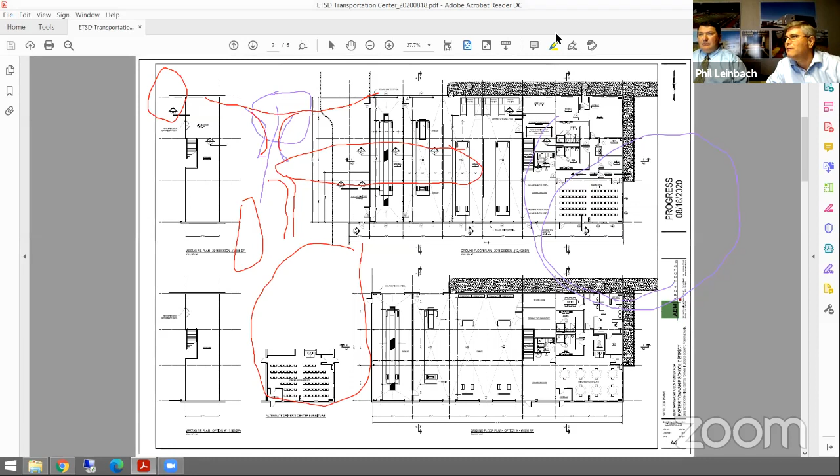And they're all on this screen now too. So where's my erase? Clear—oh, there we go. Sketch was a lot easier. I gotta turn that off.

Here we go. So what's showing on the screen right now, the upper plan, is the bus garage as it was left off in 2015: 12,400 square foot footprint, about 13,185 square feet of floor area that includes the mezzanine. I'll zoom in on that first.

Starting from the left, there was wash bay equipment, an automatic wash bay pull-through for the buses, a second drive-through bay that we talked about. The orientation on this plan is the same as what we just saw on the site plan, so you don't have to try to imagine this differently. These are two service bays.

They're pull in, back out. This bay has a mezzanine in it that's part storage and so forth. And then, obviously, a restroom for the mechanics to access here, a stair going up to the mezzanine. Additional storage, utility room—that's probably going to be where your electric service and gas service are coming into the building. And then, of course, the office and driver's area on the east end of the building.

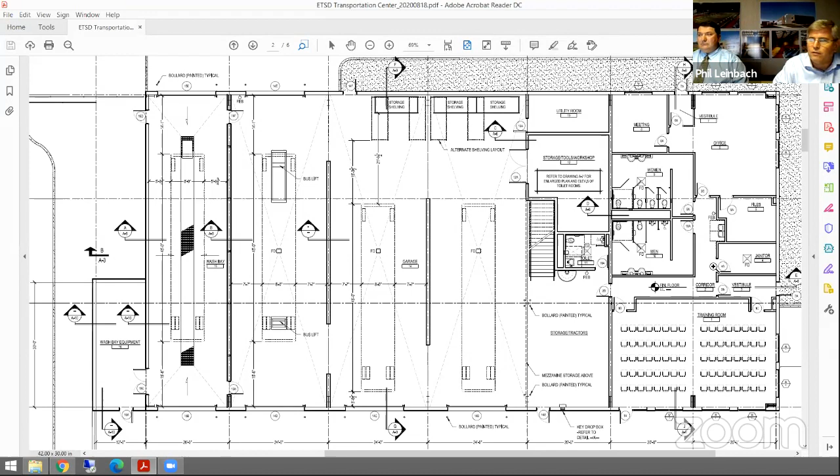After meeting with administration and with Rick's help in looking at some efficiencies, one thing we did was the overall wash bay got a little bit wider.

With the wash equipment gone and the need to have a portable mobile scrubber in there, the feeling was there just wasn't enough room to move around the bus that it was in there. We agreed with that, so that one did get larger.

And the previous design had shown some separating walls in between. They are eliminated, so there's plenty of clear space. We're looking at about 14 feet between each bus, roughly 7 feet from any bus to a hard wall surface. So plenty of room to move around.

I think safety is adequately addressed with clear movement around there.

Also, we changed the depth of the overall building. That decreased. We skinnied up the clearance at the back of the bus to about 3.5, 4 feet. And we have roughly about 13 feet to tire storage racks along the front of the 2 service bays. So they were some very good things to help us reduce the overall scope of the footprint.

Overall, then, because the building got narrower, we had to give a little bit of thought to what we could do here. Just to go back to the old plan, we reduced the number of fixtures.

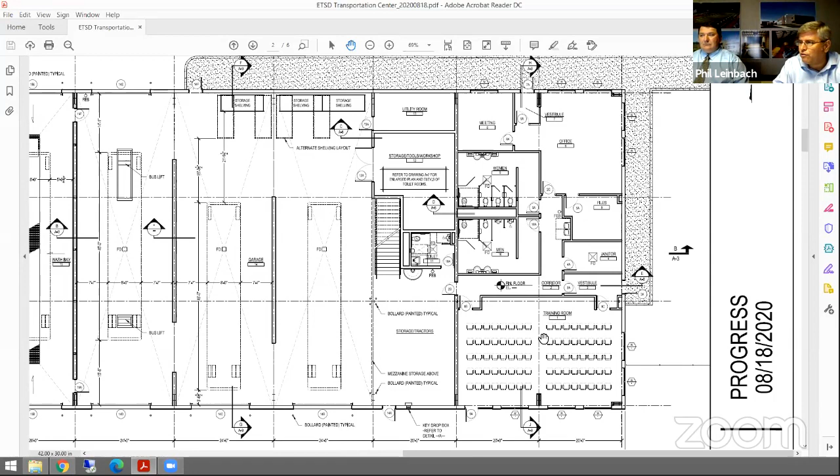Now, if Rick or somebody comes back and says I just can't do with the number of new fixtures, I think we can squeeze them back in there. But we got rid of this separated corridor off the driver's training room, as it was designated there, and just reconfigured things a little bit to deal with the lesser depth of this space. We still have the same functional program.

That corridor is gone. I have an airlock here. I put an airlock out of the back. If the drivers are parking out in the front of the building, this is where they would access the building in the morning, clock in and so forth, and then head out to the buses.

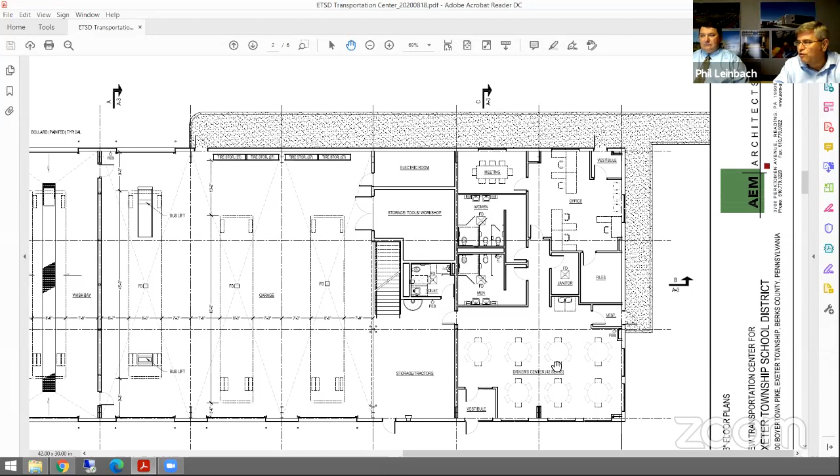So we've shown tables there for setup, more of it, for drivers if they're coming back, eating their lunch and so forth. But if we need to set it up for training, we can still squeeze about 40 seats in there, because now this corridor is really part of the driver's area to create some additional efficiencies there.

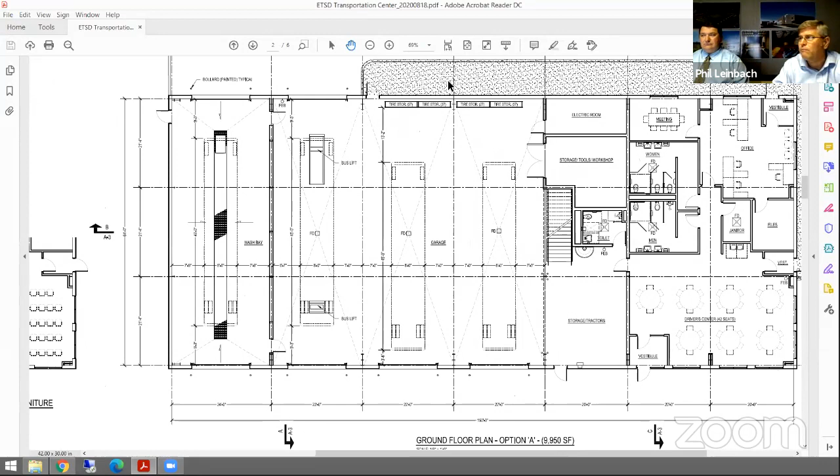The mezzanine, by virtue of the building getting smaller, is a little bit smaller overall, but it still takes up that full bay as it had previously. Any questions on the floor plans here?

I do. I'm just curious, and maybe there is a simple answer to this. Why are we using 4 bays versus 3 or versus 2?

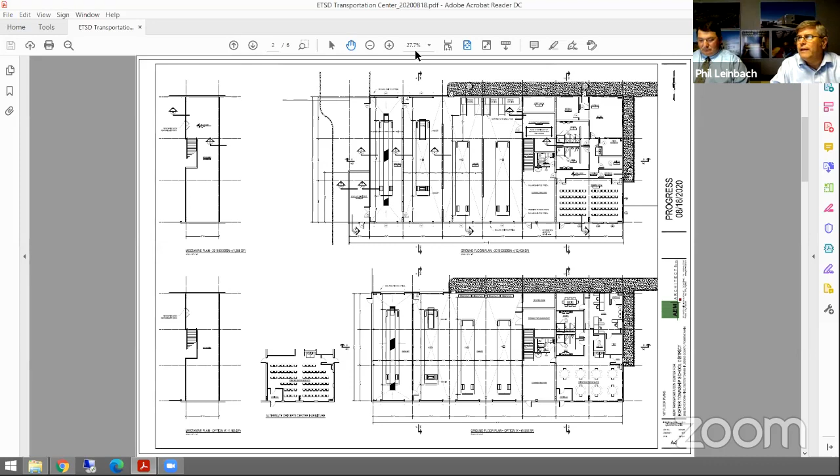We did have the discussion of the potential of eliminating a bay. The reality is we would save some costs, no doubt, on construction, but we're more or less taking volume out of the building. We're not taking a lot of constructed product out of the building.

I think previously the estimated savings to eliminate a bay was fairly minimal, was about $32,000. Inflation adjusted, it saves about $37,000 on the building, was the estimate for the savings to take a bay off.

It might be a little bit higher if we take out mechanicals and so forth, but we're just talking about heat, general ventilation in there. There's no cooling, so it is pretty straightforward finishes.

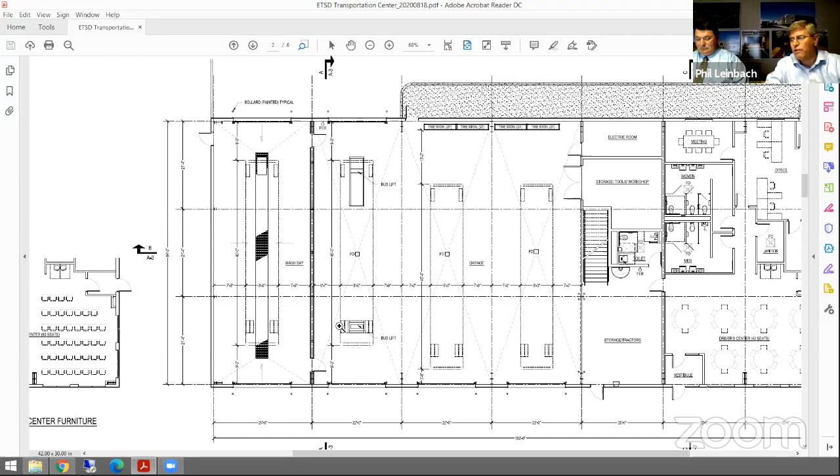Now, it is an insulated building envelope, but the bang for the buck of what you save isn't a straight square foot savings. It's not, if this overall building's about, I think, $180 a square foot on construction costs on the building, not including the site costs, I'm not getting $180 a square foot out of that to take that out.

If that's something the board wishes, as we move forward with the design, we can certainly look at that as an alternate, but that I leave to the discretion of the board and certainly administration to see the sensibilities of that. Do you guys have the discussion?

Do you guys have a running list of items like that where there are cost savings to be realized, but the return on investment is more than the investment, basically, so that if we get farther down the line and we need to make some decisions, we have a list to go to?

Because that was a pretty good response to what I'm thinking. But if there's a problem with getting support around the total cost of the building, we'd want to return to that. Certainly.

I think the goal here, as we understood it tonight, was trying to design to, I don't want to say the worst case scenario, but the largest expectation of what we would need to take to the township for the zoning variance hearing. Then once we come back and really drive the design and get the documents set, I think that's where we can talk about some of those things.

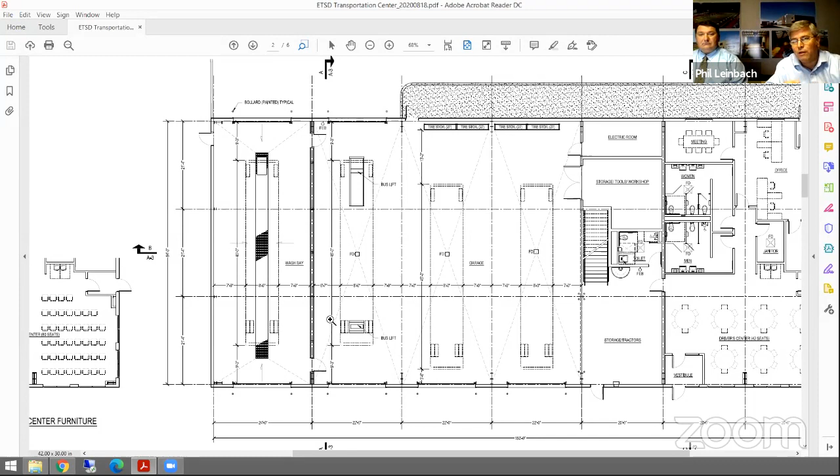Another question I have is the purpose of a meeting room. I don't know, Rick, if you can touch base on what kind of use that would have, because in my own mind, the reason I'm questioning that is the meetings where you'd need privacy are probably meetings that need to happen at the administration building. Maybe I'm just painting too broad a brush there.

Well, the drivers, we need a place for the drivers to come in. Ben has been doing refresher classes, we need a room for refresher classes. We should be doing a lot more of safety instruction, and it's much better to do it there. A lot of times you need to go to a bus. So I just think having a room where we can do those things is very good, especially when you're building a new building.

Is there a reason why you would have a meeting room that's small, like the one close to the office area, versus being able to do that in the driver's center?

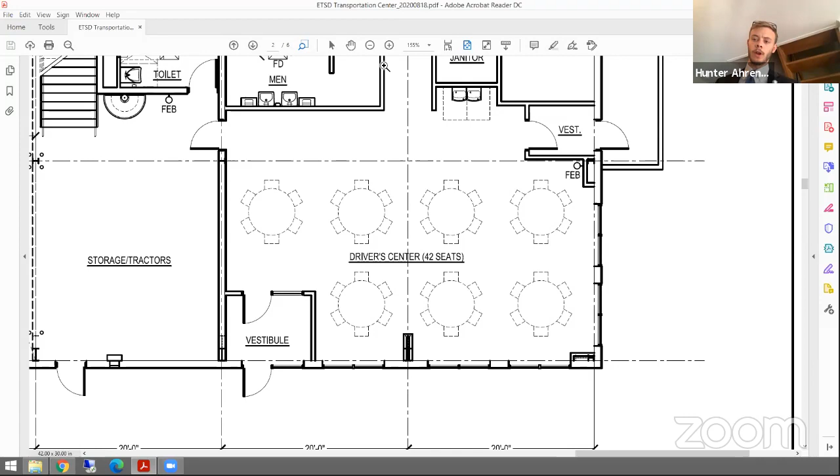Well, this meeting room here... no, one of the problems we have in this facility is no privacy. So if we have a parent who stops in, or if we have to talk to a driver in private, a lot of times I walk outside, that's the most private area. So in building a new facility and looking 30 years into the future, I thought it would be advantageous to have a room where you could address private matters privately.

If I could add to that, Rick, if you would confirm, I think we had indicated on the order of 30 to 35 drivers are coming into the building at a given time, that could be in that area as they're getting ready, clocking in, and heading out to the buses. That's on a usual day, in addition to that space doubling as a place for training and certifications.

Yes, that's correct, because you have everyone coming and leaving in less than a half-hour span, so it does get busy. And then at the end of the morning run at 9 o'clock, when everyone needs to use the facility, yes, there are quite a few there at a time.

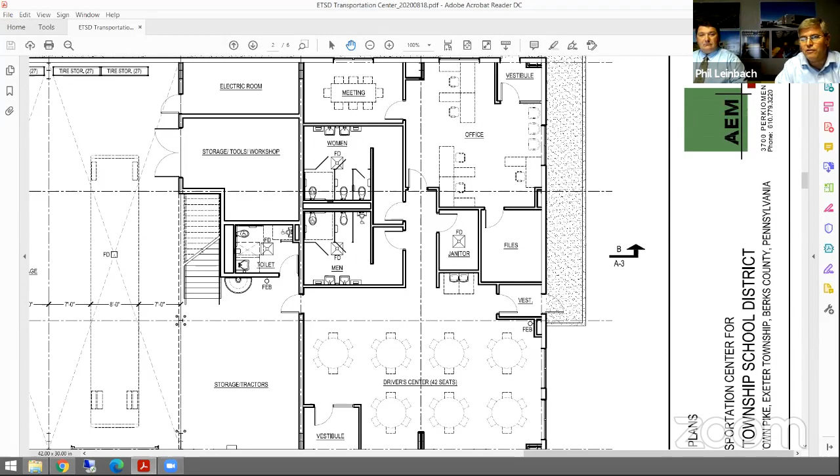Toward the end here, I do have a timeline so we can talk about a little of that. I think that will give evidence to you so you can go back to your constituents and say we have a plan in place and there's a review process, because essentially, as we go to the variance process, we're going to set these plans down and develop what we need with counsel to go before the zoning hearing board. Once we get beyond that, then we'll pick those up.

So we're not going to overshoot our headlights with this design. We're going to sit and basically stand down with developing any design, and support the variance process. Then if we get a positive result, we'll move forward from there. Okay, all right, thank you.

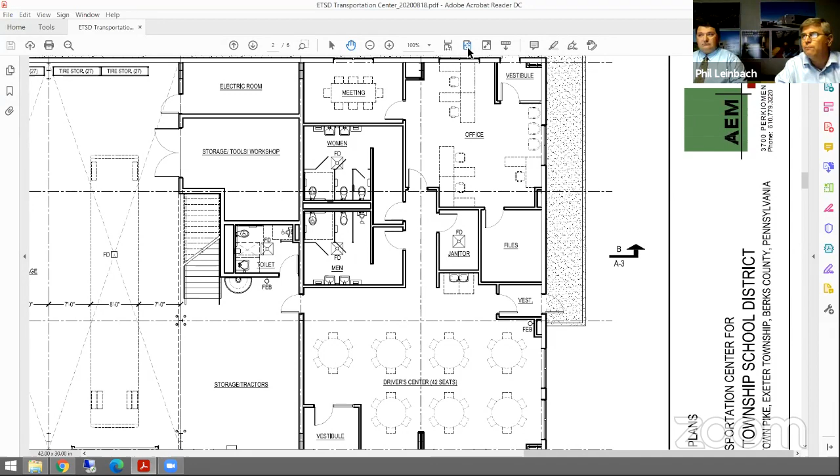Anything else? And we can certainly come back.

These are some elevations, just developing the building. A couple of things we wanted to point out: the previous design had a double pitch roof. We believe we'll save a little money because now we're looking at 3 pieces for the pre-engineered steel frame versus 4 pieces, so field labor decreases a little. With a single directional slope, I can collect all the water at the back and tie into the stormwater system on the south side of the building versus the north side.

We will watch the height of the building. If I can bring that down a little to cut down on the volume, we will do that. But I need to make sure I have adequate space for mechanicals, lighting, and so forth in there. But we think there might be a bit of savings to get out of that.

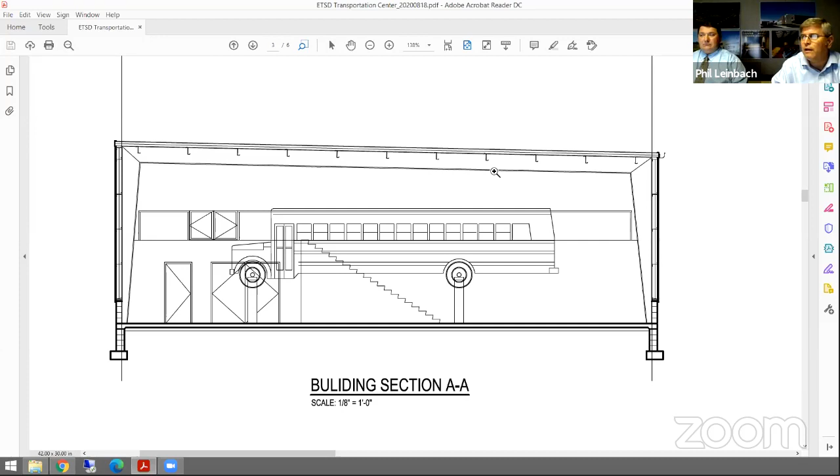So that was one thing we've looked at as a potential cost savings. I don't need to look at every one of these, but overall you can get a sense of the wash bay, the secondary service pull-through bay that has the lift, and then the 2 service bays to pull into the garage for service, and then the office. So you get a sense of the overall volume.

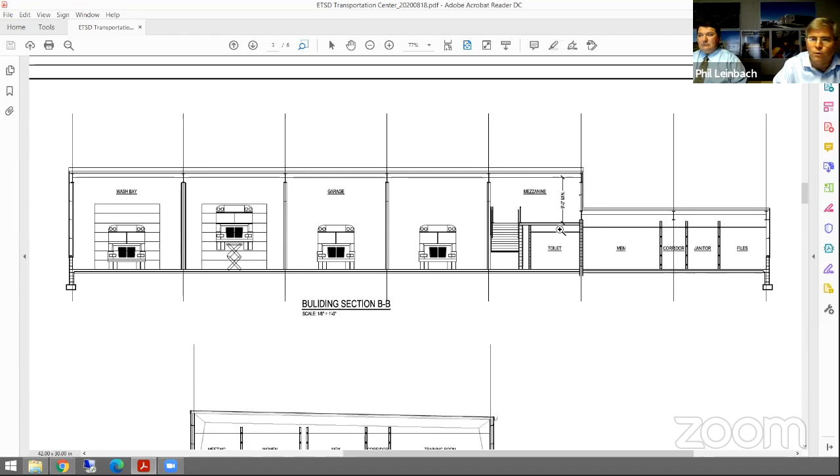We do want to watch and make sure that we maintain adequate clearance at the mezzanine to comply with the code, so that that is a usable space, and we don't want a headbanger for the folks going up and down there accessing and getting parts.

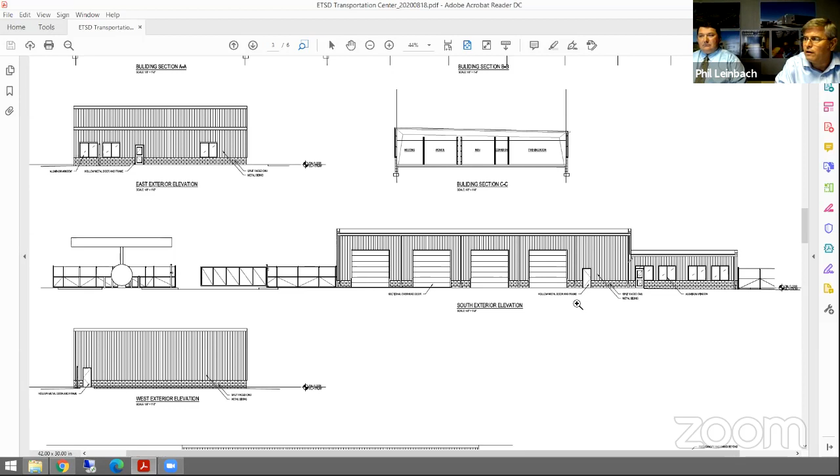This kind of gives you an overall sense - not that the fuel island is directly to the west of this, but if you can imagine this 50, 80 feet further into the site, you can see the 4 bays on the back of the building, the fuel island to the left. This is a representation of the diesel and regular fuel island, and the lanes to access that, some of the fencing and gates around the site, and some of what you'd be seeing there.

Just an idea of the rendering. I think you can see this is pretty much a plain vanilla building - it's pre-engineered steel with metal siding. I think it's important to keep a material like split face or some type of masonry up to that water table at the windows, because metal's just not going to take the abuse well over time the way a stone product would. You can't dent stone, but you can dent the siding on the garage, and we will have bollards around the garage door openings and so forth.

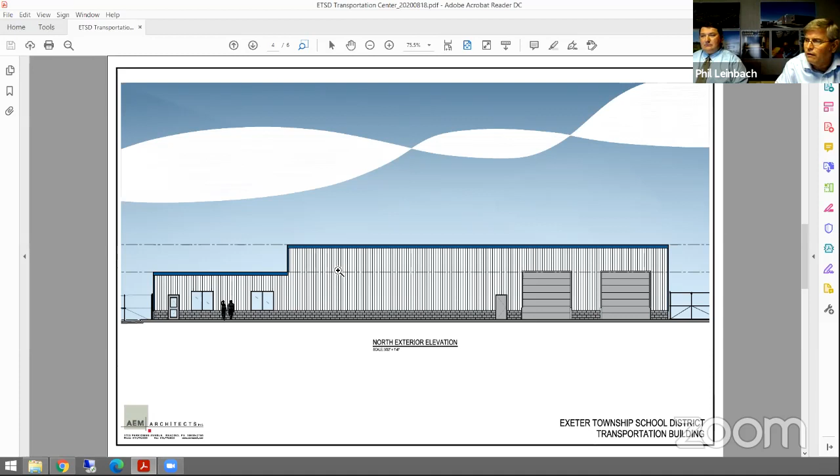And again, we're just suggesting some colors here. We're not locked into anything.

The final thing I want to look at here is a proposed timeline. We've taken - here we are in the middle of August - and are projecting everything forward from tonight's meeting. We know we're looking at about 3 to 5 months for the zoning variance process, so we're showing 3 months initially, up to maybe an additional 2 months, depending on the preference of the zoning hearing board. If they want to wait a month before they make a decision - sometimes at the zoning hearing you can press for a decision that evening - but we wanted to make sure there's adequate time included for that.

I'm not going to go through each of these line items, but essentially we're giving you a step-by-step of what's going on. We've already done a little bit of this preparatory work to define everything and get updated estimates. Tonight, if you look at the schedule, the board authorizes seeking the zoning variance. That's not intended to push you - if you come out of the meeting comfortable saying we're ready to move on that, so be it. If you say we need to digest this for a month, then this whole thing simply shifts a month forward in the process. Then you see some other things in here.

As we're going through zoning, we might start some approval to develop some of the preliminary things. And that's really looking at the end here to say, hey, we're pretty confident that things are going to move positively if you want to get going. That's not to say that we just wait and push that out to this point.

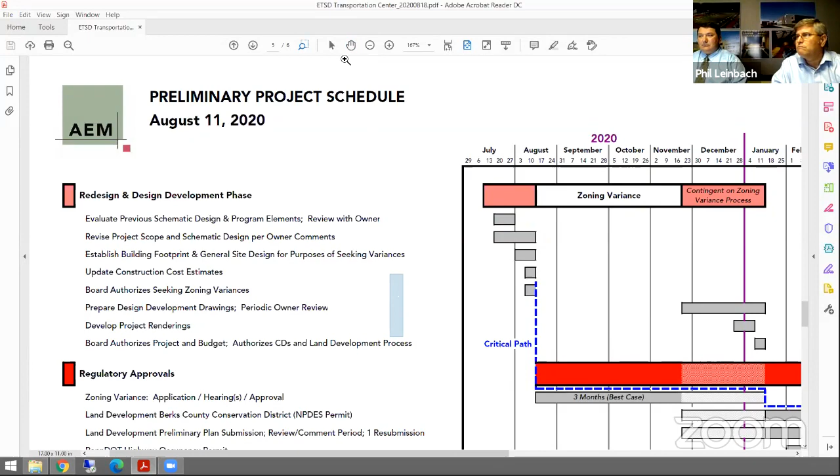Look, lost the hand here, hold on.

Assuming things go well at the zoning level, we've created this critical path, the dashed blue line. The next thing that comes in after the zoning hearing is the regulatory approvals become the driver. County Conservation District, where we need to go for approval for the DEP side of things, is estimated to take at least 6 months. Apparently they've had a pretty good backlog there and things just have not been moving quickly.

In addition to the NPDES permit that we would need through the Conservation District, we would be moving forward with land development with the township. At the point that we feel confident, we would approach PennDOT for the highway occupancy permit. The existing driveway is permitted, but only as an emergency access, so that would need a new permit and a revision for that to be used as a principal access to this project.

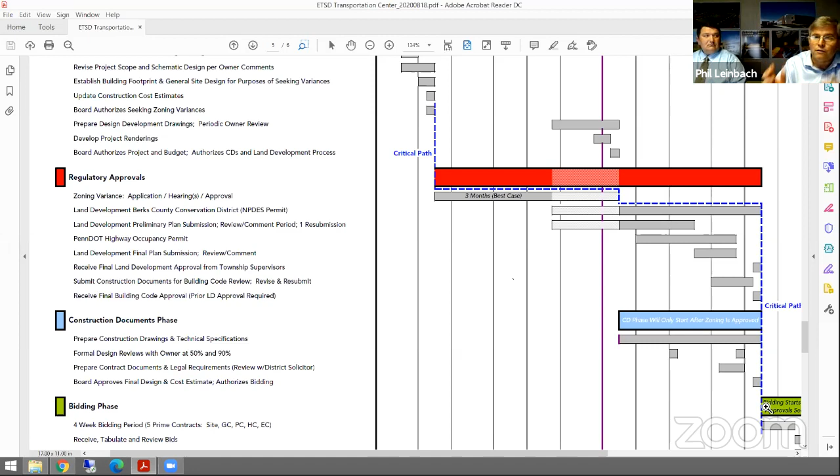Once that's in hand, those are the regulatory approvals we need to have in hand to get full land development. Once land development's in hand, that coincides with us going to bid. We don't recommend bidding until we've got full land development in hand, because I don't like surprises after the fact. Sometimes you have a conditional approval, and then at the eleventh hour somebody says, oh, by the way, we need this. Nobody likes to come to the board after the project's been awarded and say, hey, we need an extra $50,000 because we didn't know about this.

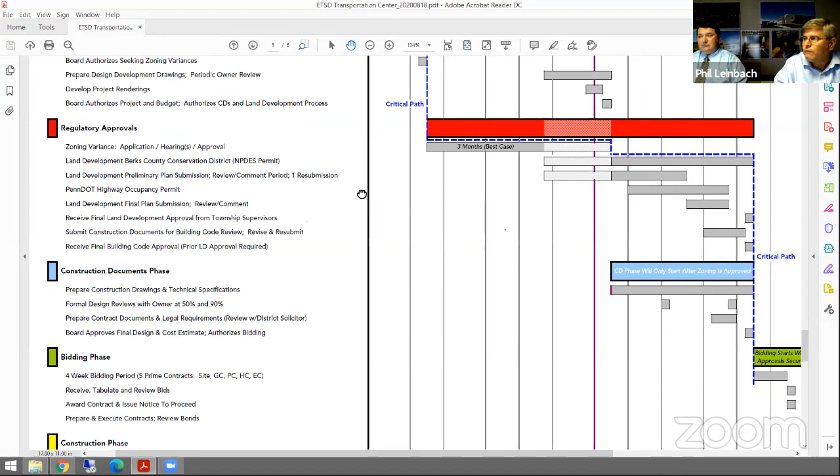So we want to make sure we have all those regulatory approvals in hand before we go out to bid. With that, as the regulatory process is going on, we'll get started back with the construction documents phase. This is where we really pick up, cleaning up the design development and moving into the construction documents phase, basically getting the documents ready for public bidding.

I just want to touch on one thing here. Looking at this project, I think it's crucial that we consider a fifth prime contract. By law, we will have to have general construction, plumbing, HVAC, and electrical. But because there's so much site work, almost half of the project, I think there's money to be saved for the district by making site work a separate prime, where they would come in, prep the pad, turn it over to the general contractor, and then the four trades take off on the building. They'll have some site-related work with site lighting and things like that, but pretty much leave the site to the site contractor.

One of two things will likely happen: I'll get a site contractor that's going to try to be a general contractor, and all too often that doesn't work well. Or I get a general contractor that brings a site guy in, he gets his $2 million bid, marks it up 5%, and you just paid an additional $100,000 on $2 million worth of work. So that's something to keep in mind as we're looking at this. That could be a savings on bid day just by breaking out another bid package.

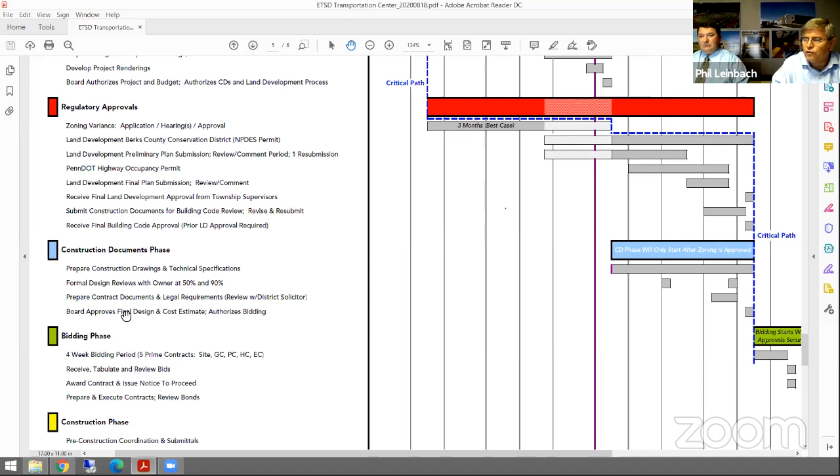We're showing formal design reviews at about the 50% and 90% marks during the construction documents phase with the owner, at which point we can hammer out the details on what should be an alternate in the project—design alternates, add and deduct alternates, and those types of things. Then the board approves a final design, updated cost estimate, and authorizes bidding before we hit the street with the project.

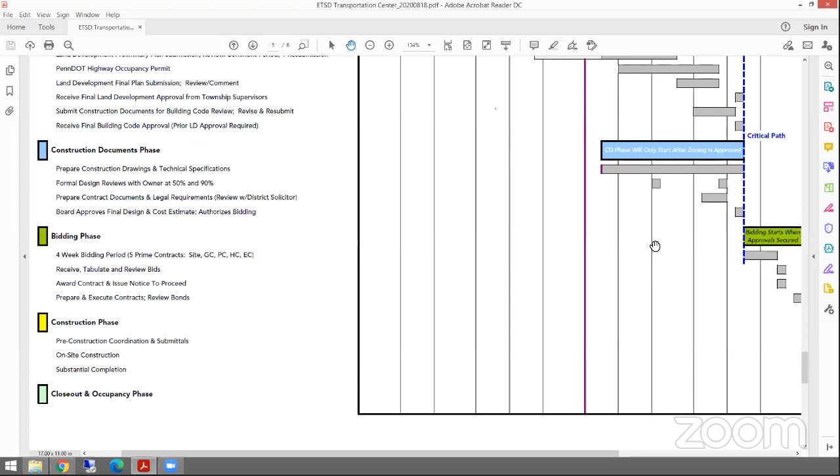Once we go to bid—and now my screen's getting too short for everything here because it's over on the other end, let me try to capture this—got the wrong one here, bear with me.

Bidding phase, we've got roughly about a month in there for that. Obviously, bid the project—that's my recommendation, but that's your decision at the end. Get contracts in, reviewed, approved, bonds, insurances, everything confirmed, construction starts.

We're looking at roughly an 8 to 10 month construction schedule, but in all likelihood, if we're following this schedule, we'd be going over the winter with site work, so we'd probably stand down midwinter and wrap up the site work in the spring. But if I can get the building pad started and ready for the general contractor to get on by August or September with a pre-engineered steel building, it's not out of the question to have the frame and foundations up and erected and getting closed in before we get into the heart of winter.

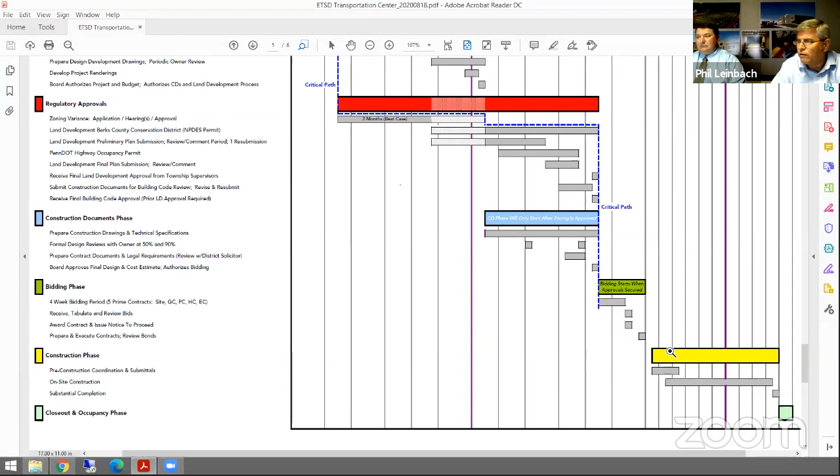So, substantial completion and project closeout gives you a quick overall view of a proposed project schedule moving forward. Questions on the schedule?

What's the likelihood that PennDOT will ask us to either widen the roadway or add a turning lane? Yes, in all likelihood, I would say one or the other, or perhaps even both. And what would that add to the project in terms of both dollars and timeline?

Timeline won't add anything. I believe the dollars are in there for that, but I will double check. I believe there was an assumption that we would be doing something substantially larger with the entrance itself than what you have there now, and I believe that was included, but we can verify with Stackhouse. If we get beyond that, into traffic lights or more than shoulder widening and a turning lane similar to the other entrance, then possibly we'd be looking at more cost, but I will double check. I'll shoot an email to Ann and she can distribute that answer back to the committee.

Any other questions on schedule? Just one, and I think I've asked it before, so I apologize. Are there any other government agencies or entities we will have to deal with here? Not that I am aware of at this point. I can't even think what that would be. Obviously we're going to have Exeter Township with a building construction permit, but I think we're dealing with the county, PennDOT, and Exeter Township. I'm not aware of anything else right now, and I'm racking my brain to think what else we could be dealing with. Certainly if we become aware of something we'll let you know, but I think there are three we've got to focus on.

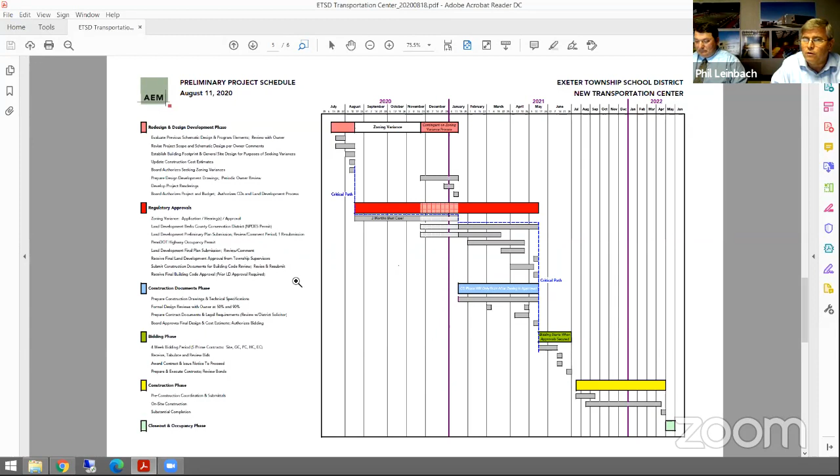Okay, thank you. By way of costs, I want to go back to where we were in 2015. This was a $3.4 million project with a 12,400 square foot building. Justin, when he was working, updated that number in 2017 to 3.9. We updated the number with inflation adjustment based on our note here, roughly averaging just under 3.5% per year. That's the number we brought to the administrative team when we met with them: 4.3 million.

After getting information back from them, you can see the site cost increased, largely because of added costs with the LP fueling station and creating new parking spaces for the parking displaced by the LP fueling station. You'll see a reduction in cost in the building. We went back and did a revised updated estimate, so it doesn't come down drastically, but it's down overall from last time. This is basically where we're comfortable right now in today's dollars with the general construction. The site increased largely because of the LP fueling, so general construction and site work total about 3.1 million.

Plumbing construction decreases from losing the wash bay—most of that $260,000 was in the wash bay number previously—but then it increases again because the LP fueling station would be furnished and installed through the plumbing construction contract, as would the fueling island for the regular diesel fuel. HVAC construction is relatively unchanged; one thing we deleted is radiant heat in the floor slab, which was in that number. We didn't drive that back too hard since it's not a big piece, but that was one thing we agreed could be taken out. Electrical construction's big change is that about $10,000 included back in 2015 for power for the wash bay equipment has been backed out.

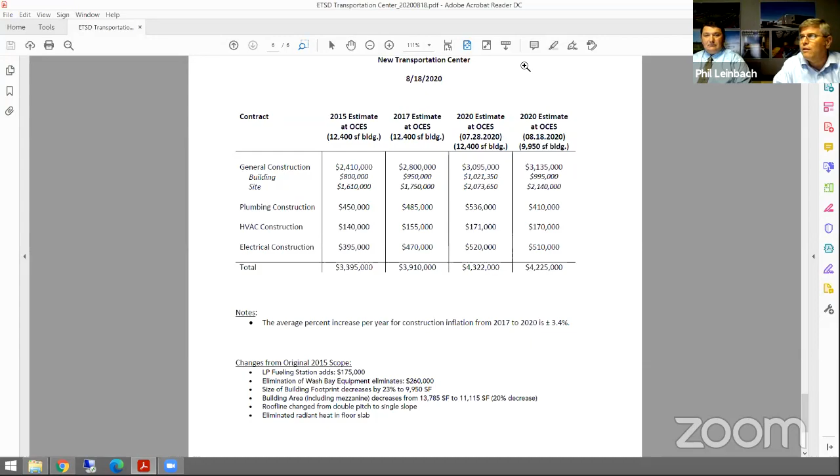I do not have a breakdown on that, but you are looking at probably substantial cost for asphalt and paving work. Obviously, the excavation is a big number. That is not a flat area of the site. It's flat where we're siting the building, but there is a lot of cut and fill. If I can take us back in here, all this is fill. You can see where we're building that out to cover up the slope. So there's a lot of fill material we're bringing in, cutting into the existing bank somewhat, but there is a lot of earth moving that needs to take place. I would say principally that's your big expense, is the paving and the cut and fill work to move the dirt around the site and any import or export that's generated.

We like to get these things close to balance. We never represent that to bidders because that's always change order number one. So we throw that back at them to determine if there's import needed, you're bringing it in. If there's export, you're taking it out. It needs to be in your bid, and I'm not paying you extra for it later on.

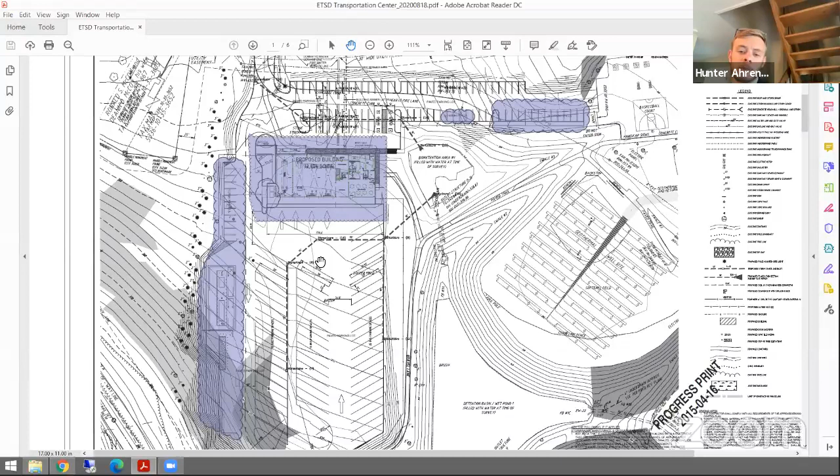I think you referenced in the beginning the possibility of doing stone, and I think you guys had made a decision that there's some loss in there with constantly having to refill stone. I pass the Eshelman's parking lot every day to work, and they use stone for the vast majority of their parking lot where they have their bus fleet, for several of the districts in the county. I'm wondering if you can speak to that a little bit.

What we had suggested was the area where the bus parking is, perhaps put it in stone temporarily. The real aggravation with that is obviously we don't get to pick when the snow falls. And when you're pushing snow where you have paved cartways and so forth, it's tough on the guys that are plowing. It's far more efficient if I've got a clean push through the parking lot, so you can get your lot cleaned far more quickly and efficiently. And with the timing of trying to get buses out, I certainly understand not wanting that.

There again, it's something you can look at. It would be one of those things I would press for if you can afford it in the bid. But that again is a matter that the board and administration need to take up. That's not my decision to make. So I leave that in your hands.

This is Dave Hemberger. I had a question about security fencing. Is that included in this plan? Yes, basically. It's hard to see on this plan, I didn't want to hit you with too much. I think pretty much the entire bus lot area up to the building, we have an automatic gate up in this area. That is all fenced back here. The front of the site is not, because we want that parking to be available for elementary overflow.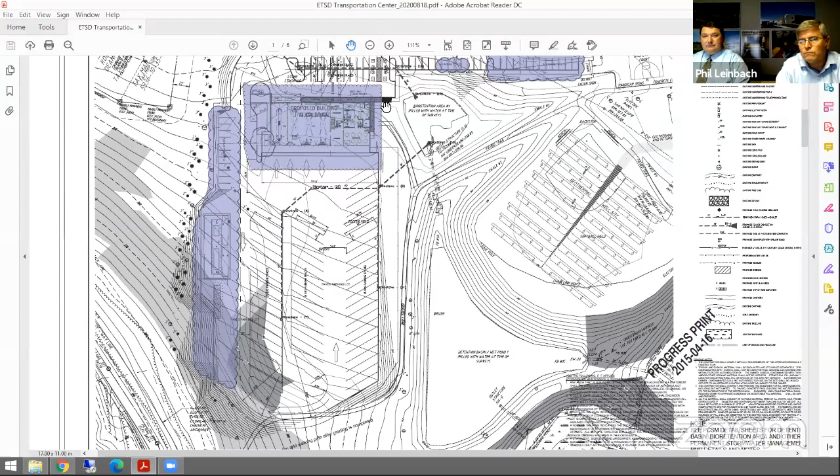But that would be done under the plumbing construction contract, and that's fairly typical under plumbing or HVAC. They pick up the fuel. In this case, I think they're looking at it simply outside the building. It's a lot of piping and so forth, and all of that is DEP certified work. And with the LP, I think the International Fuel Gas Code and NFPA are going to have some dictates on how that's installed as well. What's the total cost of that particular component of the project?

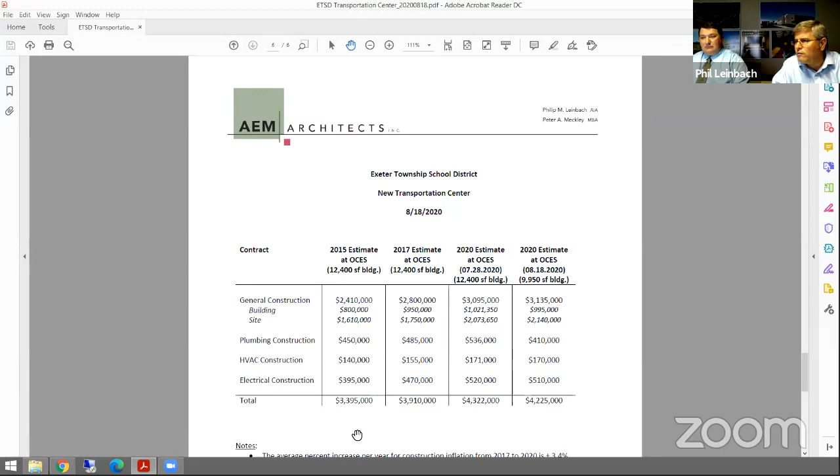We have it estimated, I believe, on the last page here at 175 added to the project. Okay, and that's the fuel island, that's a canopy, that's the additional parking that we have to shuffle around to create space for it. So it's not all just fueling station costs. It's basically the change of the site work to incorporate and accommodate that LP fueling station.

Yeah, the LP fueling station, I think, was $20,000 to $40,000, plus then there's going to be flat work. So physically, that's probably, I'm going to say, in the neighborhood of $80,000 to $100,000. The rest of it's probably site cost.

I know we visited a school district that had an LP fueling station, and it seemed like they received a considerable amount of assistance in that particular component of the facility from a fuel contractor. Might have been, is it Rhodes? Was it Rhodes? You might remember. Yes, it was. Yeah, and you were on that visitation too. It seemed like they had recommended as well.

You really kind of calibrate the size of your system by your usage, and the contractor can pretty much put in or remove those size containers at will. That's a little bit of the discussion we had with Steve Gribb at SDE, that whatever we design there, we want to make sure there's adequate footprint to expand as your fleet may expand. But I'm obviously not going to build for a fleet of 30 LP buses when you've got 2 right now. So that's something that would get investigated a little bit more before we finalize construction documents for what's right today and what gives you flexibility going forward in the future.

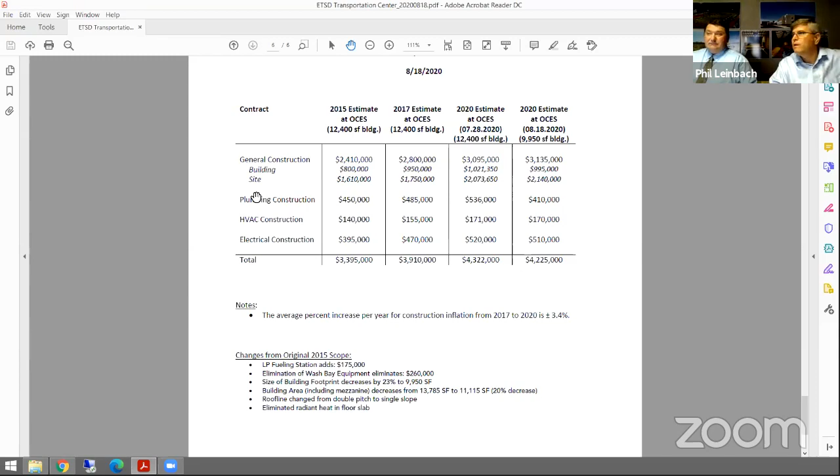I know we have the business functions to get to. What is our meeting time here, till 6:45?

I think we were scheduled until 6:30. I probably need 2 minutes to go over mine, so you take your time. Oh, okay. Rob, can you just briefly bring us up to date on what's going on in the facilities area so far this summer?

Certainly. The junior high school chiller project is completed. Final punch list items have been taken care of, and my staff was trained, so that project can be officially closed out.

The Jacksonwald and Lorane HVAC project, as I reported at the last board meeting, has been delayed on the univents, which won't arrive until August 28th and 31st. We've been working hard following behind those contractors. Towards the end of last week we started getting rooms handed over to us to clean and prepare for teachers to come back. My staff's been working very hard with that. The goal is by the end of this week to have all those classrooms cleaned and ready for teachers to come in and teach virtually if that's the option they choose.